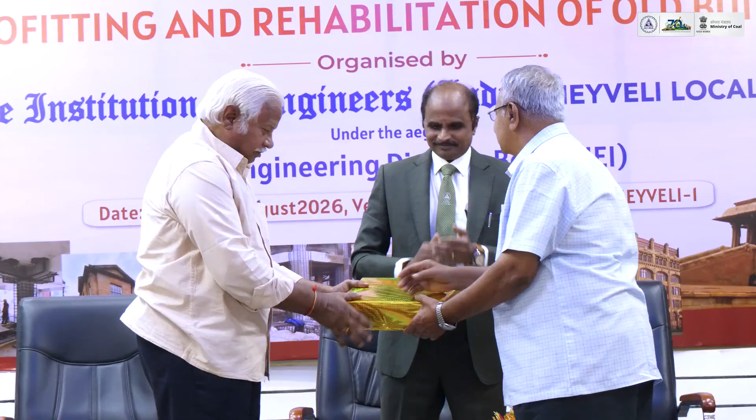Well, this is a very important place. It is a historic place, as it has been rightly narrated by our engineer Sivanyanam sir. It's a historic building, historic area. Because IEI, the Institution of Engineers, has brought several marvels in this country. It's a century or beyond century old institution. And coming to Neyveli Center or Neyveli chapter, whatever we call it.

Come Rajmohan. So another great... I was just looking that some mines' presence is not there. At the right time, mines people will visit. So that is how he has done it. So Rajmohan has come.

This Neyveli Center, if you see, started in 1967. It is much older than many of you present here in this hall. And if you go through the laurels of this institution, at the moment when I took over, when I listened to something and went through the files, I found it has brought transformation in this Neyveli. I do not know all these people by seeing them, so I got a little embarrassed.

It is not that just some programs or something they have brought, some changes they have brought. They have lighted the lives of many people. This is the center which has produced the highest number of AMIE during that period. And not just that, several people have occupied very high positions because of this center.

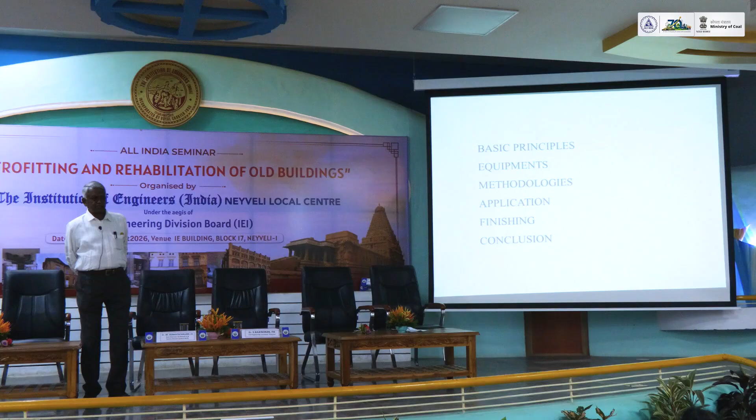See, it is only basic principles, there is no complicated fourth degree equations, nothing like that. It's only a weight - it goes down by gravity, and you lift it, then shift it. That's all. And it's not a frame structure, it's a load bearing structure. What we did that time, it was load bearing - even mud was used inside.

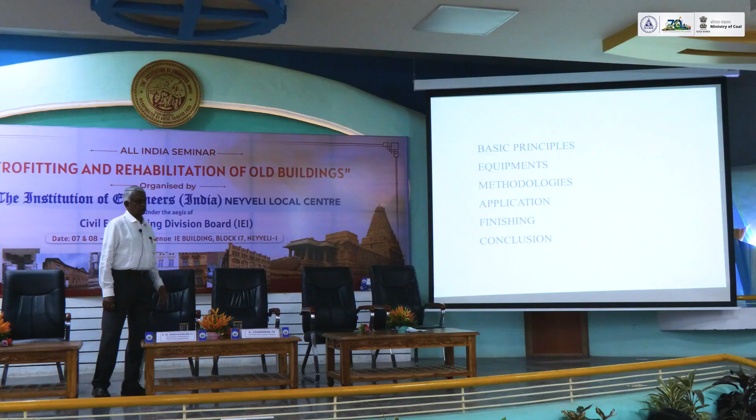So how have we done it? Basic principles, equipments, methodologies, application, finishing, conclusion. So this is the way I'm going to show you. See, the labor force, the labor cost, we'll come to it later.

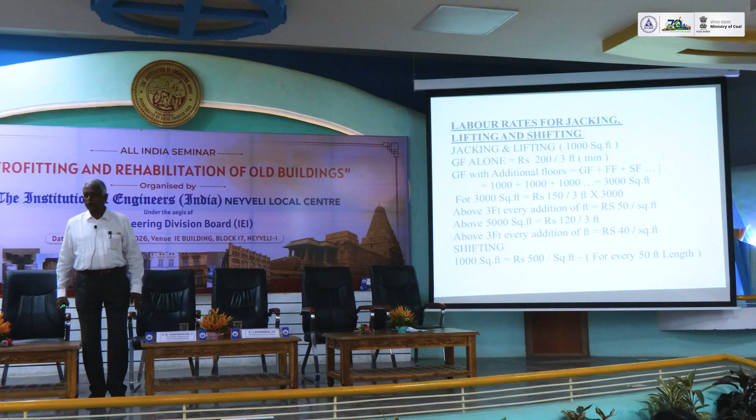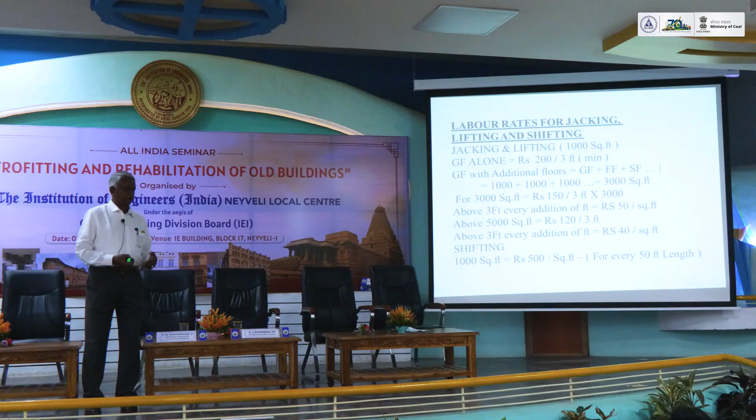For a 1,000 square foot house, if you want to lift it by 3 feet, that will cost us around 4.5 to 5 lakhs. Then the repair and creating a new floor and other things may work out to cost another 5 or 6 lakhs. So overall it will be around 10 to 12 lakhs to renovate an old house.

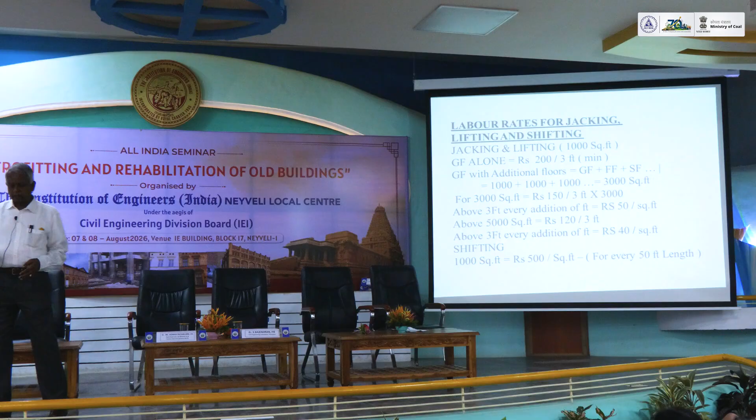How it is done - see, what we do normally, below the plinth, we cut the wall into 1.5 feet, 45 centimeters, 45 centimeters like that. We leave a space of 45 and cut 45, and insert a jack. It's only a mechanical jack, not a hydraulic one.

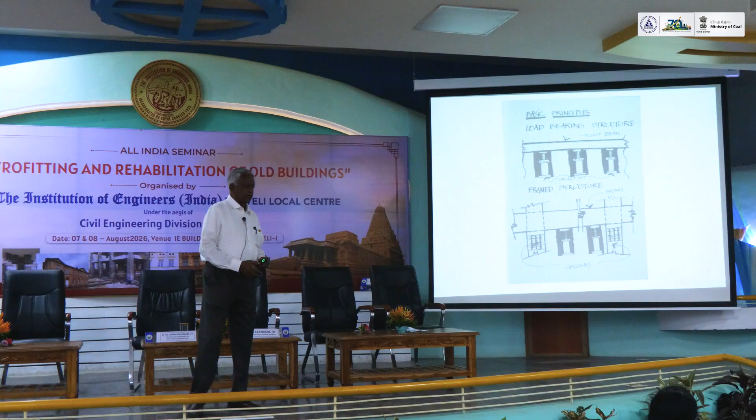See, foreign countries, they do it with hydraulic, but I'm against that. For a small house, you don't require that much machinery and costly equipment. If we make a mistake and the machine fails, there will be some problem, and facing that problem is very difficult - that's why we leave it, and the hydraulic system is very expensive.

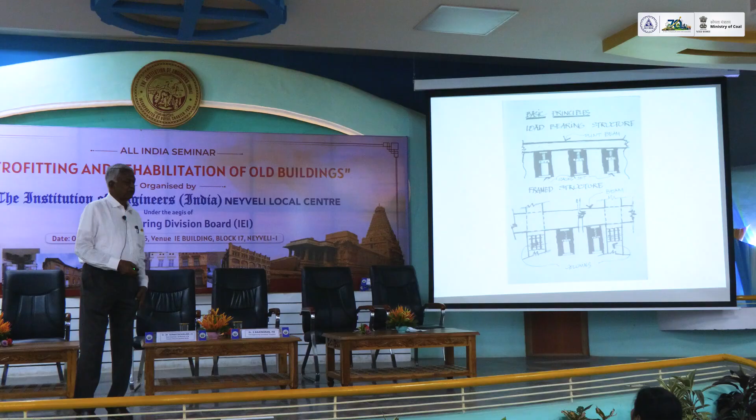Continuously we will be introducing about 150 to 200 jacks all around a 1,000 square foot house. Every 45 centimeters there will be a jack. We cut it and introduce it.

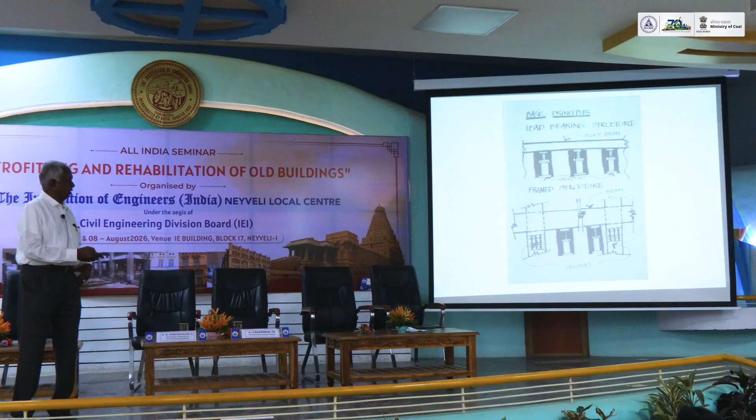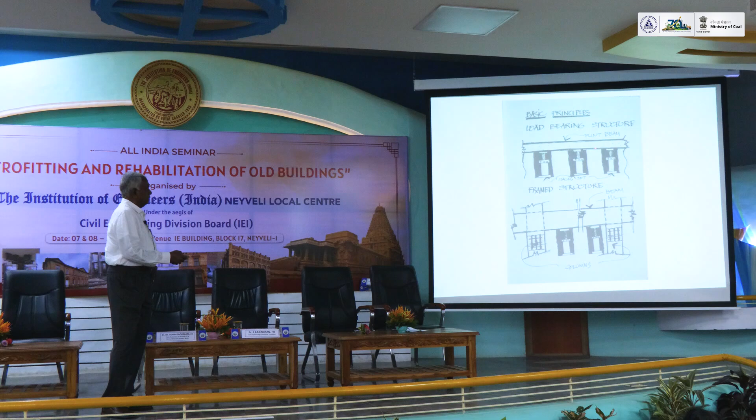Here, this is the frame structure, this is the normal load bearing structure. See, below this, once we cut it and lift it, once you lift it, it will get detached from here - three jacks or four jacks.

You remove it and insert a channel and fix the jack below the channel. Continuously we do it, and once that is done, till we complete the jack, the channel will be there. After building, you can remove one by one. All the channels are welded - welded together as a single unit.

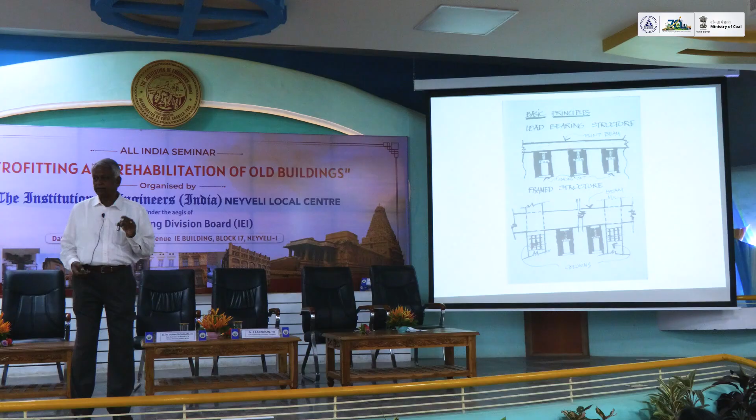See, the support jacks - for every 1,000 square feet house, we will have to load up to 200, since the weight of the house will be 200 to 250 tons. Around 150 to 200 jacks are used, and each jack can take a capacity of about 30 tons.

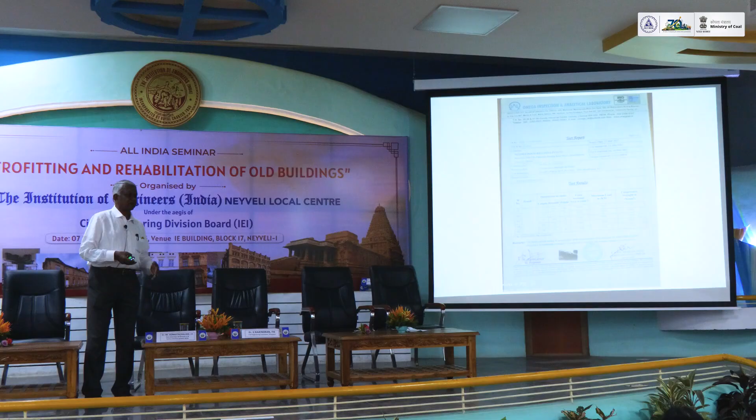See, this we introduce after lifting - a brick made out of concrete. The compressive strength we have given, the compressive strength of that brick will be 3 times more than the normal brick. So once the foundation is replaced by a concrete brick, it will be stronger, and the foundation will continue for another 80 or 90 years. This is the concrete brick we use.

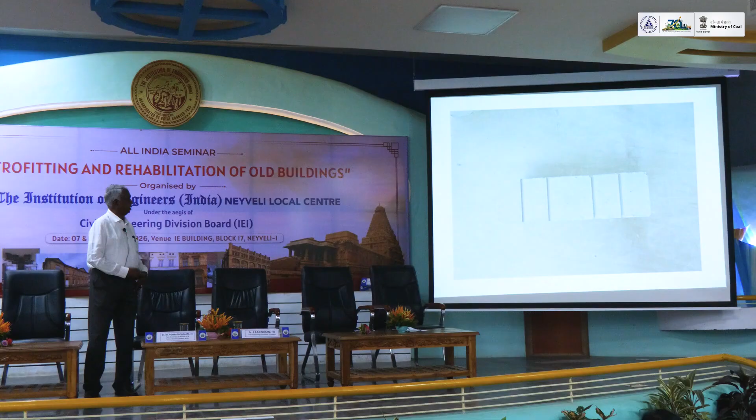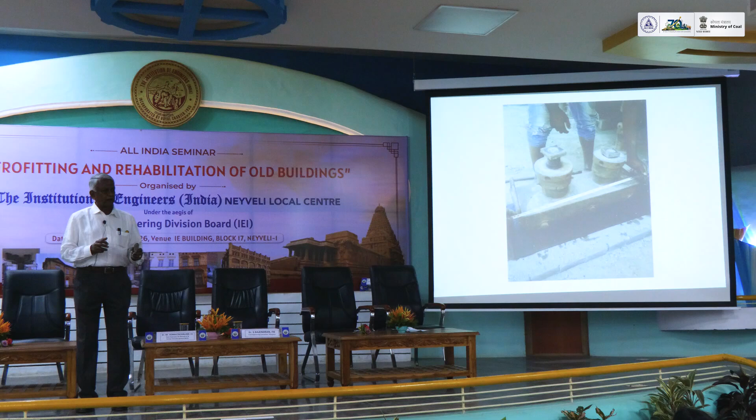See, this is a jack, and we have another jack for rolling. The lifting is done by a jack, it's one gear, we lift it. After lifting, we wanted to shift it, so we have rollers underneath the jack. That capacity is about 80 tons. This is one of the roller jacks.

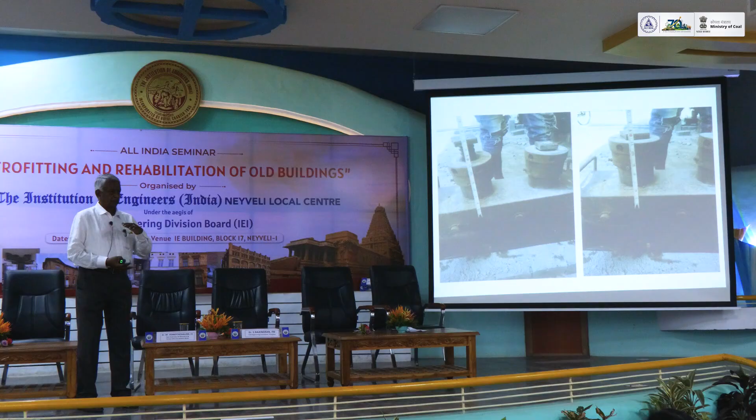The height will be about 12 inches, and once you shift it, it goes about 40, 50. Over that, we keep a wooden block in between to go for another 12 inches. See, look at the bottom of that, you see the gear, the shaft, roller or whatever you call it, iron roller.

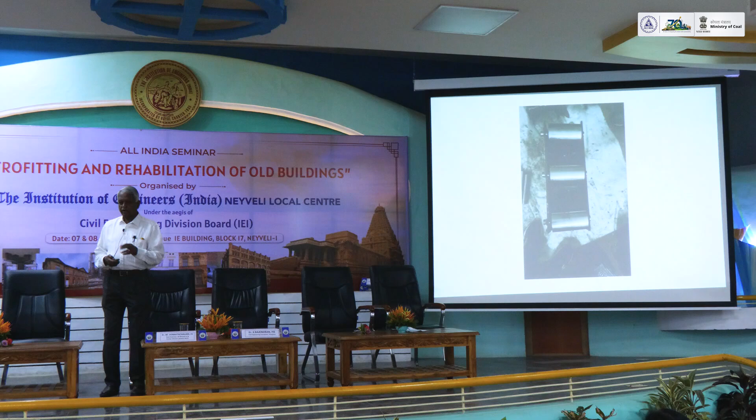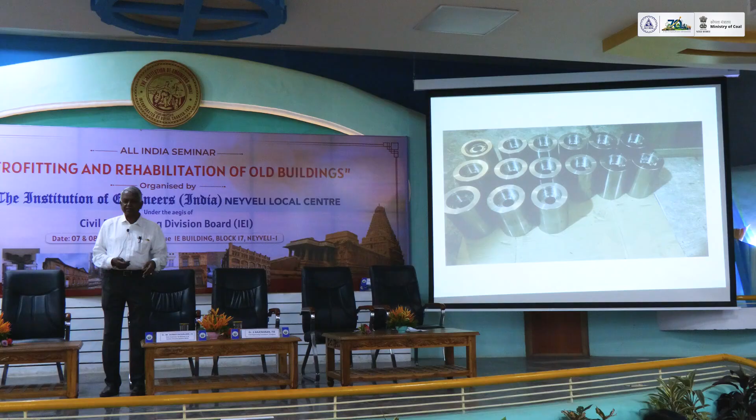See, it is placed like that. These are the rollers underneath the jacks. Probably I don't have to explain this to NLC engineers, you would have seen much bigger rollers of this type in a roller lorry.

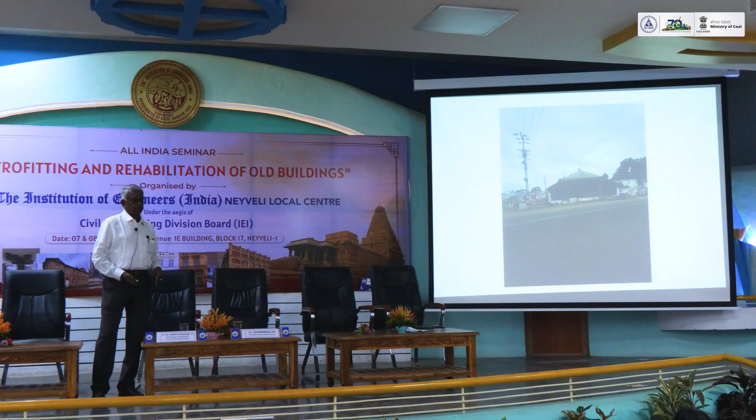See, this is the original mosque, which was just projecting inside the highway. This was the one, 385 years old. The mosque inside was laid with asbestos sheet roofing, which we removed. Inside, there is a Madras lime mortar building wall, and this has got arches, the windows have got arches. Over that, the asbestos sheet was laid.

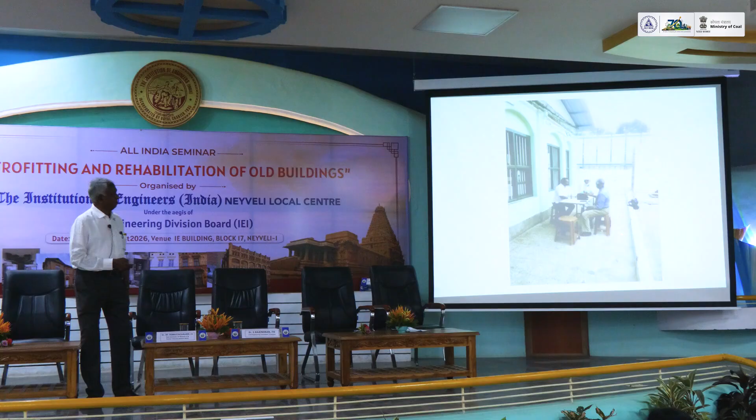See, this is the lifter. The jacking person is from Chennai, Babu. He has got a North Indian group of workers, so he controls them. About 15 to 30 people will be there, maximum 30, around 20 to 30 people will be there, and we are programming the schedule of how we are going to do it.

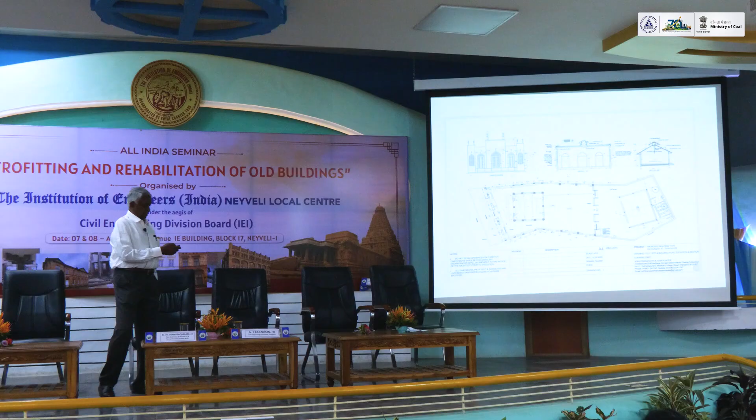See, this is the plan. Originally, the Dargah was here, in the same orientation. We lifted and shifted it 20 feet from here to this place. See this, originally it was here and then we shifted it. After shifting it, we have constructed a regular mosque, Dargah, with the RCC pillars here, a hall.

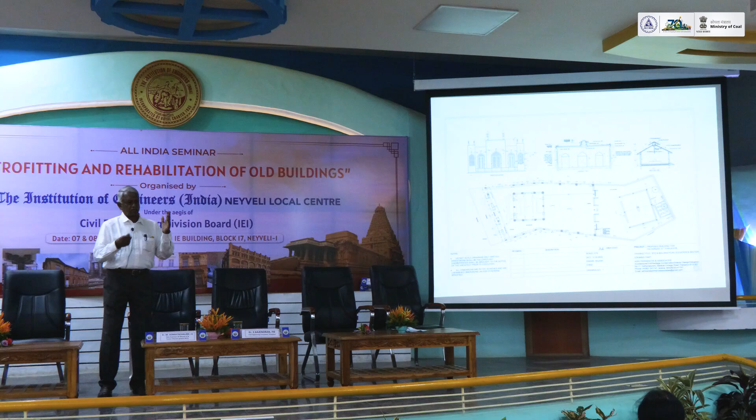And behind that, there was another cemetery that was also repaired. The design is a contemporary design, mosque design, but we followed the traditional system of domes and arches.

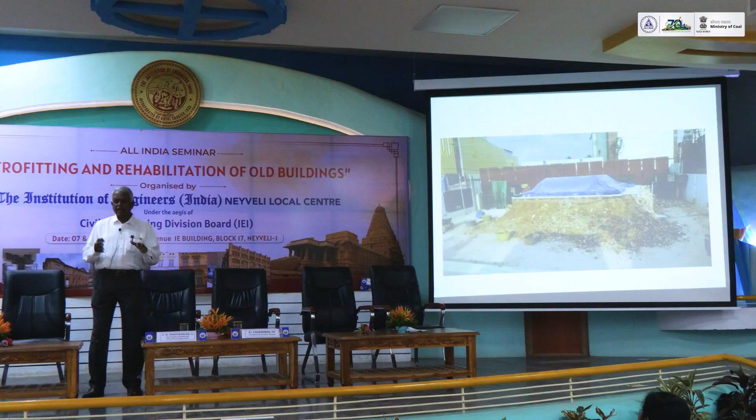See, this is the thing. The client was very particular about the bottom soil below that cemetery, 14 feet. He said 14 feet, we have to pack it and take it. So we have done it like cake packing, the whole thing. See how we have done it.

We used girders, I-sections cut like this, and then using either mechanical means we did it, see, you'll be seeing it. A pulley block with chain, and sometimes we used this JCB, just pushing it inside. See, this is 14 feet below.

You have done it continuously, 14 feet with 14, 14, 14. You have made it like a cake.

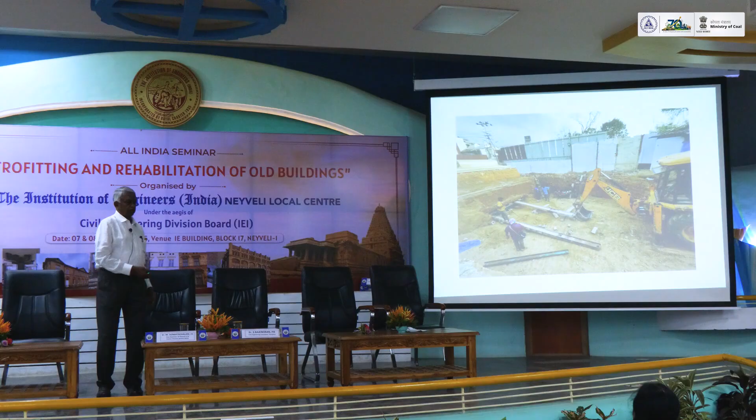But at that time it was about to rain, so we had to protect that mud. We have done it like this, using tarpaulin for that. And we had a pit also. We are very particular that rainwater should not get filled, so we saw to that. We made a ditch above that, at road level, and made the water flow in that direction. So we saved that also.

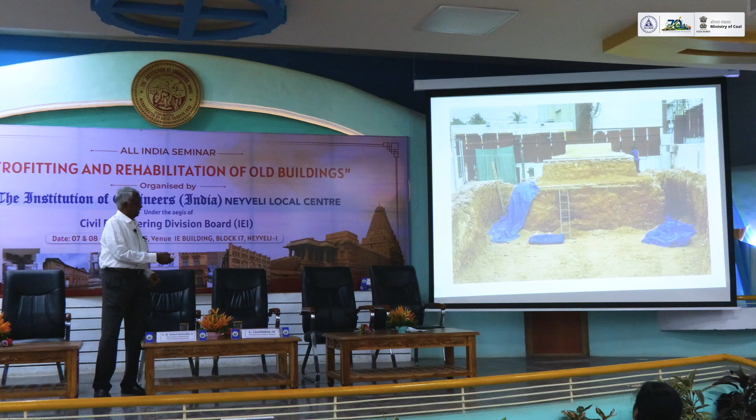They did only the lime mortar work, and they had put marble over it, that was in cement. All the rest was soil, only soil. And the client was very particular about the soil, he said you should not lose the soil. Even a small chunk should be placed inside, he was very particular about it.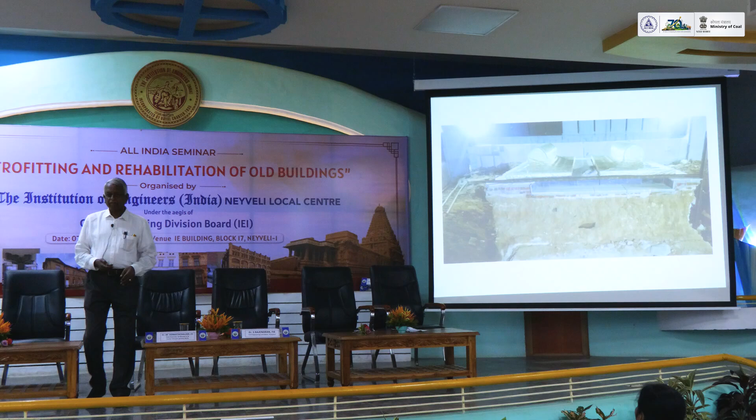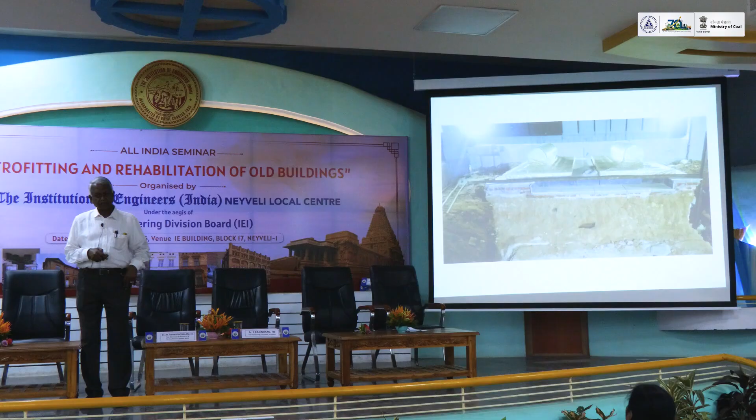I-sections were placed continuously, welded, we have welded it. No sheet, we have just inserted it. The I-section was taking the soil. Yeah, see, look at this.

After inserting, we used wooden planks with steel frames all around. We made it like this - something unconventional. You don't have theories for this, no precedence for whether it can be done or not. It's purely design at site, as it is in your hand. As an engineer, whatever has to be done, we have to do it.

Look at that, we packed it like that, here also, and the steel sheets are there. It's about 6mm steel sheets. We put it all around.

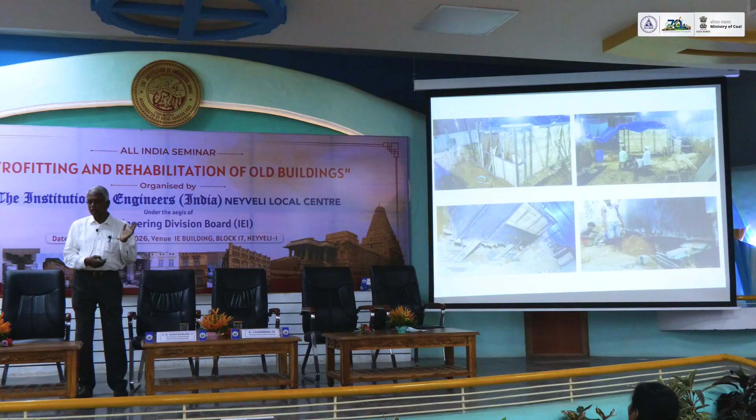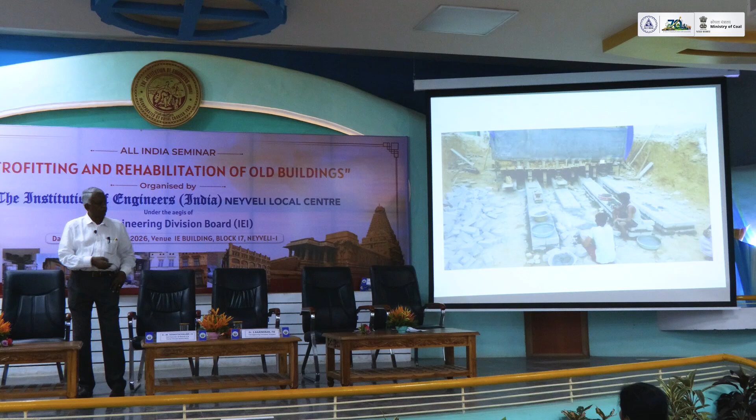Then after lifting, we wanted that to be pulled, so we created something like a path with concrete blocks, where all 5 jacks were placed in a line, the moving jacks. So we shifted along that.

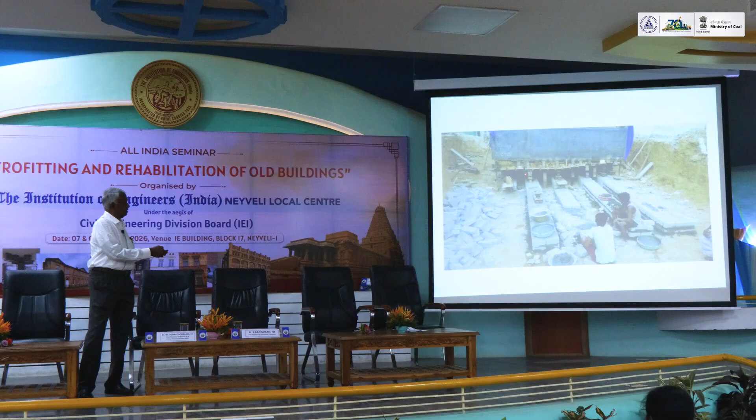We placed this in the direction it is going to come. We put a model here. How the pulling or pushing is done, everything is by pulleys. See, this is the one. He is there.

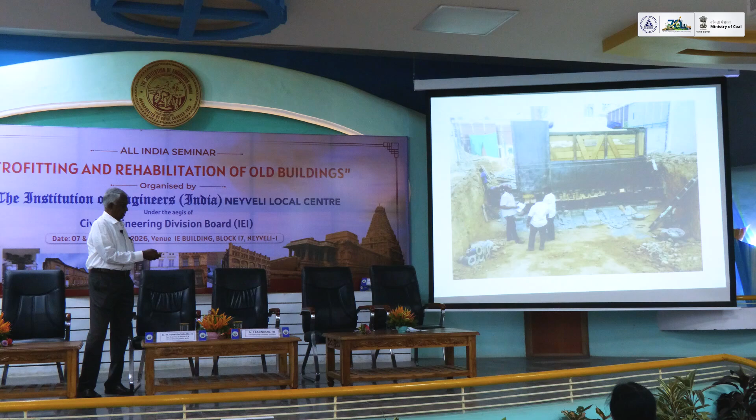People are moving underneath because we were very clear the whole thing was supported by I-sections. And I was scared - even the owner himself went underneath. I told him not to do that. He said nothing, the whole thing is so. He is an electrical engineer, so he said he could see the supports very well, and nothing will happen. We went inside. We made that.

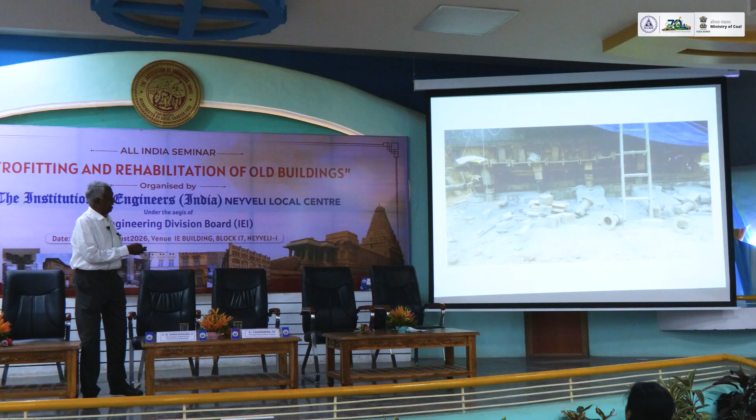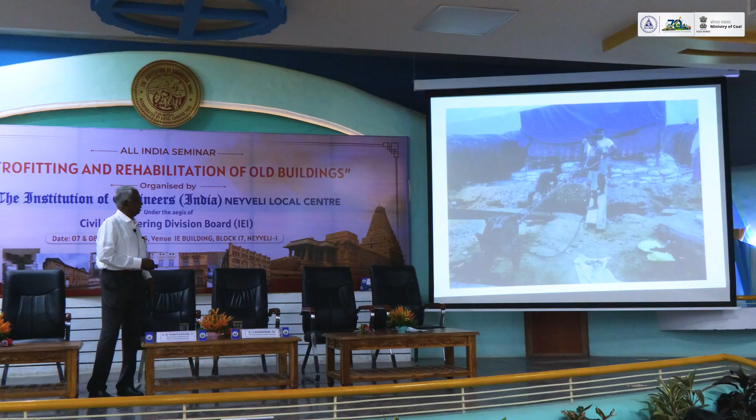That's a video, underneath this. After that we are pulling it out, taking it outside with the pulley block. Purely manual - we have to do it manually only. See, the place, you can't take a machine inside. You can't take a tractor, dozer, or JCB - nothing will work there.

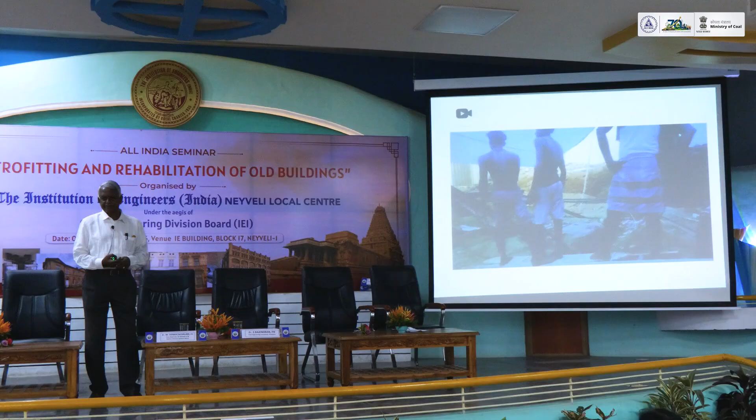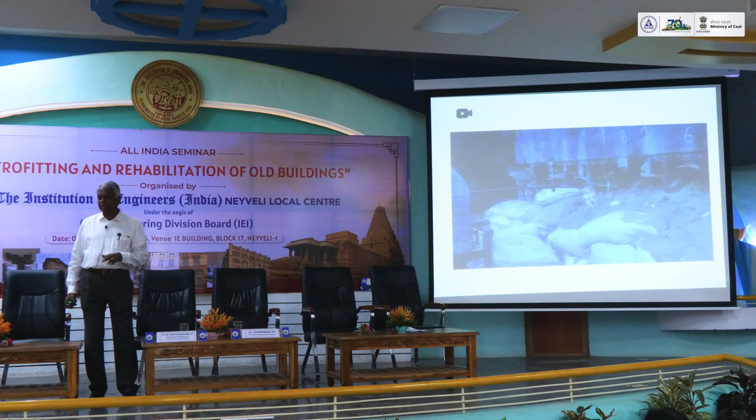One thing you need is a lot of patience and a lot of observation. You have to do very careful observation. Your judgment is very important - how you judge and decide what times you have to do it. We had very loose soil underneath. I made sure it was made-up soil when we did that.

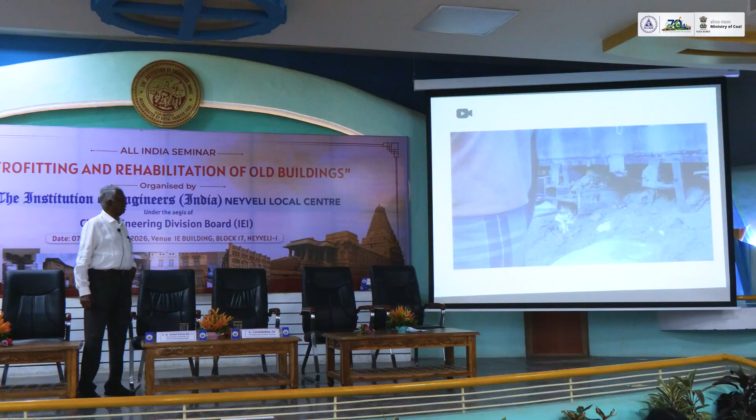If you do it, probably you engineers will think of something else different. But anyway, this was possible only in that place.

Chain pulley, pulley block - that's the chain pulley block. No, pulley block. That pulls it.

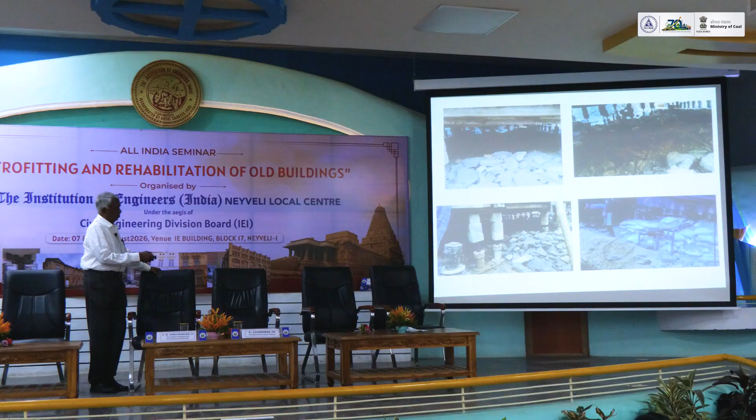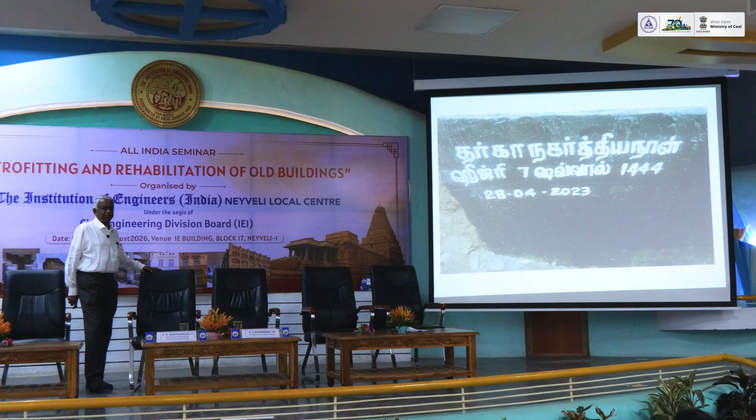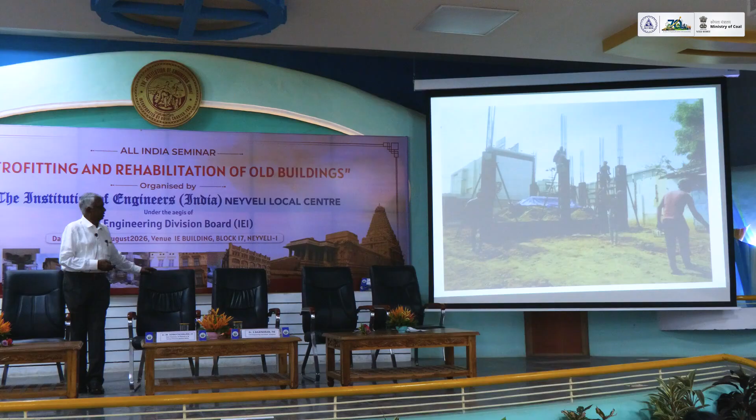After that we shifted and started constructing columns all around - RCC columns, filling, everything was done.

We maintained the same thing in their religion. They follow and are very particular about the orientation - they don't want to change that symmetry in any way, even 1 or 2 degrees they don't permit. They want it the same, so they mark it and shift it to the same angle. We have done it.

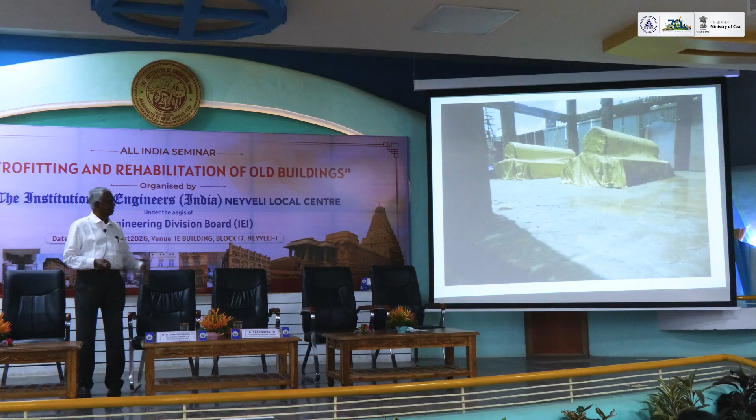When our forefathers built it, as the ex-chairman said, it was grand - built as an earthen dam, what they call a seepage dam. From 2000 years back, they put big boulders on running water. They chose a place and put boulders one after another. Due to gravity, it went inside and got submerged in the sand. The whole thing was packed. Then during high flood level, the water always seeps through - that is why it doesn't develop any pressure. That's called a seepage dam.

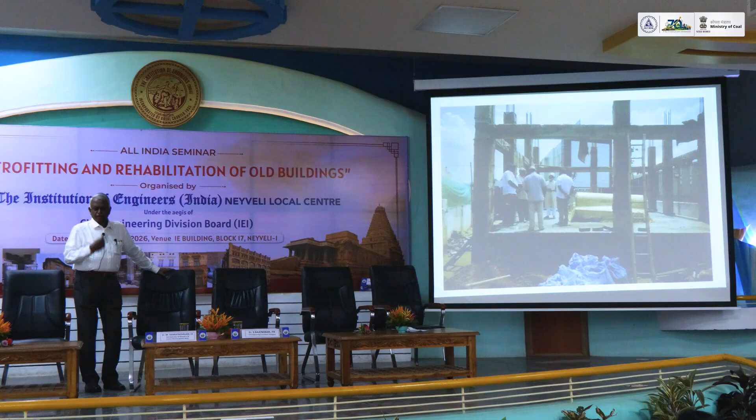That's why in hydrology, dams and everything - Percy Brown, I think, was a historian of architectural history. He says Dravidians are the greatest dam builders after seeing Kallanai.

The column extended for a hall at the back. The original shifting was over, and to provide a dome over it, we have put a ring beam. You put a real same type of symmetrical dome.

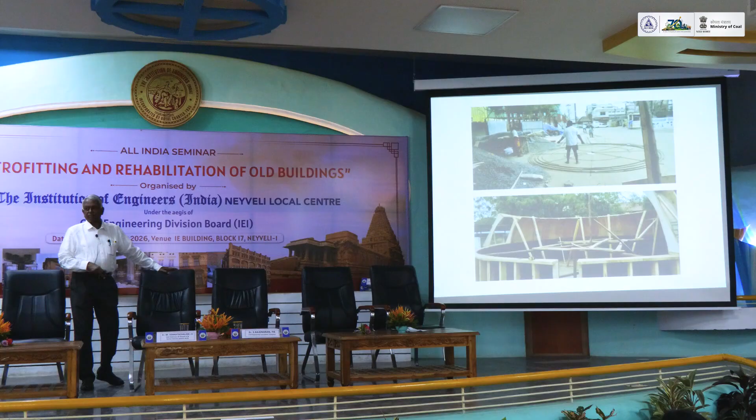In that dome, how we did the reinforcement, you can see it. This is how we have drawn it to the ground, line by line. For every ring, we marked it and corrected it, and we did a steel centering, plywood, flexible plywood. We did the curve, took a template and made a curve, and then in that we put the steel, and we got that there is a steel thing here.

In a dome, when you do the concreting on a slope, you need an outer formwork also, but we have not done it. We have done it layer by layer, taking it to the top. I had worked in Kalpakkam atomic power project, where when we did the domes, we had an inner formwork and outer formwork. The springing of that formwork on the dome starts with 90 centimeters. The bottom wall thickness will be 90, and at the top it will be 50 - it's a shell structure. Similarly, we did not do a shell structure here. We did the same thickness, both 6 inches, 9 to 6 inches.

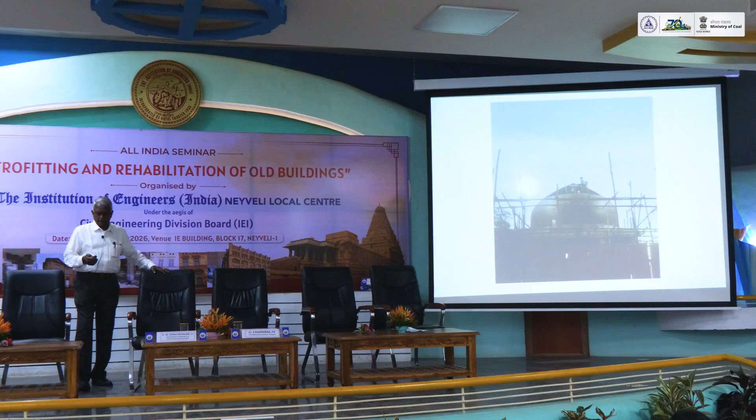See, this is how it looks when you see it from down. And we have a lot of ventilation everywhere here. And this is how it looks now. A lot of visitors are coming. We achieved the traditional heritage building, we have kept the heritage building in the same place, and we have made it much better for the people to enter and go. So this is an additional thing.

Why we do this? The first thing is sentimental reasons - everybody has faith in this dargah. So everybody wanted that, and the client was ready to spend for it. See here, the shifting is not that much - the construction is regular, very traditional construction.

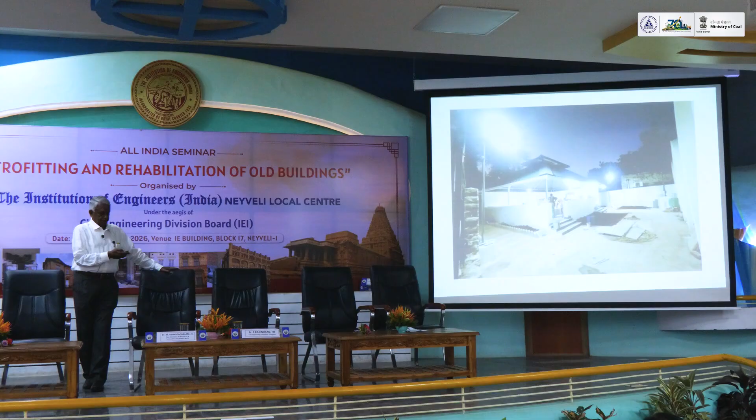See, it is opposite to Maharaja's shop, it is there. See, this Tanjore, it is in the history. In Tanjore, it is about 385 years old. This structure is in the history.

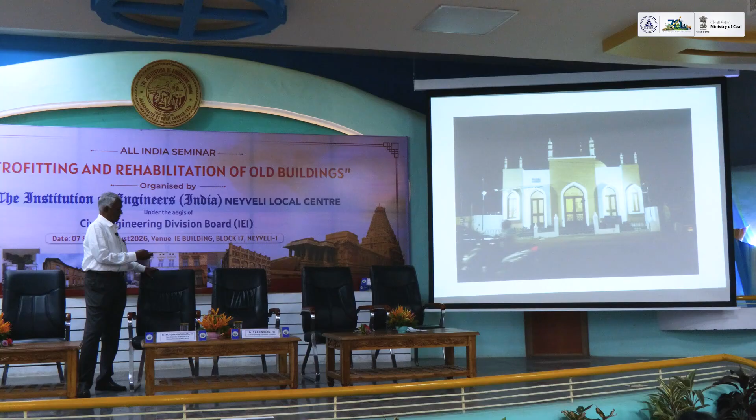So that is one thing they wanted to renovate - you can't say renovate, replace it, or even you can't say replace. Retrofitting also, it's not an exact word for that. It is strengthening and relocating. That's why I said jacking, shifting, and then lifting - jacking, lifting, and shifting. We have followed all the traditional motifs and the construction techniques, we did that.

The same thing, this is brass. Here, one problem is the lightning arrestor. We have taken the lightning arrestor nearer to that, higher than this level - this, what you call it, pinnacle, above that. So we were able to tackle that also in this.

See, the old and the new - same location, same angle, parallel to the road. We maintained everything, and exactly we were able to replicate the angles and other things. It was one of my career landmarks in that - giving back what I learned, giving back what I had. So this is one of the very important things in my career.

By doing this, we have renovated or regenerated that thing, the concept of that mosque and other structures.

See, another thing - I come from a place where Tanjore, what is it famous for? A very big temple, Perudaya, Thanjai Peruvudaiyar. You know what is the speciality of the temple? Sahar wanted me to add something to that, so I am just getting into that. As an engineer, what do you know about it? Yes, sir, foundation is one thing. Another - what is commonly said?

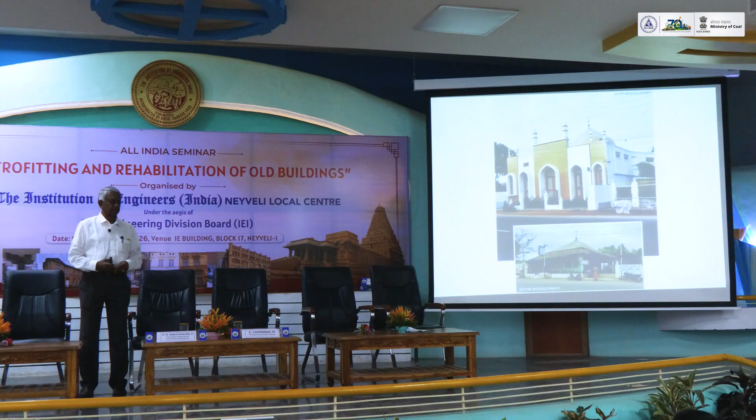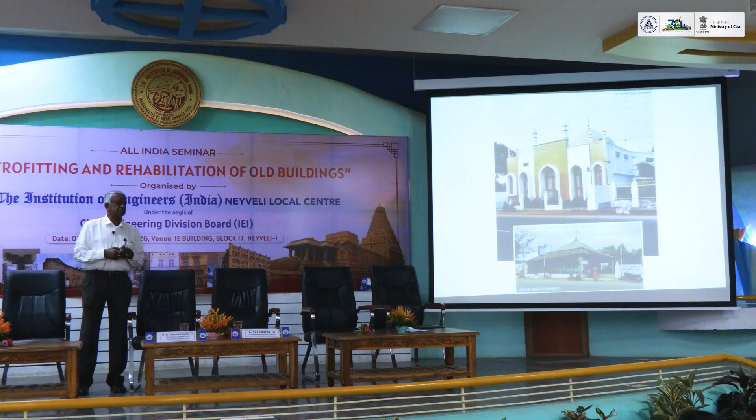The Sthapati, the chief Sthapati, is Rajaraja Kunjaramalla Perunthachan, chief. The second one is Nitya Vinoda Perunthachan. The third one is Gandaraditya Perunthachan. So 3 architects - they were called architects by modern naming, but they are the people who designed this. Especially the top chief architect, Rajaraja Kunjaramalla Perunthachan - Rajarajan has given credit to all these people in the inscriptions. He has given the names and written the names there. So that is giving credit to the person who has done it.

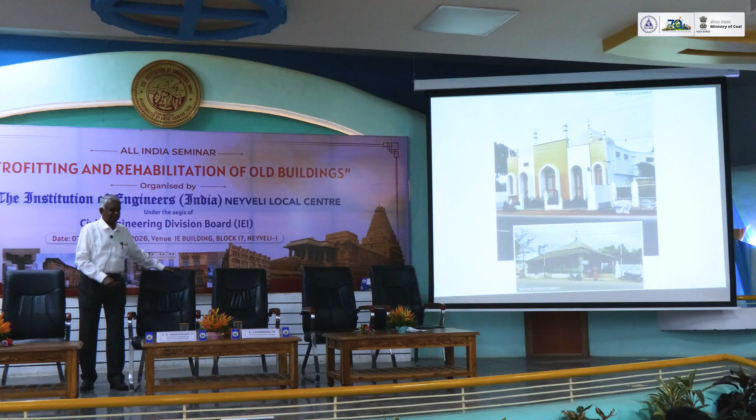And I think he wants to say something more, but anyway, when time comes.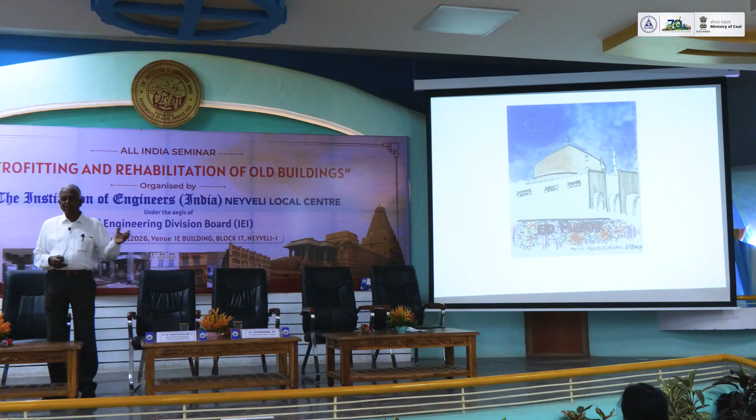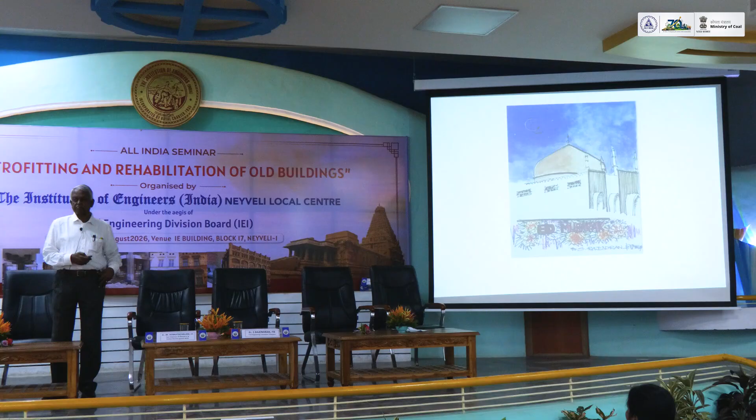And I did a sketch of it and then sent it - I do a lot of urban sketching. So one of my sketches, which I did for Ramzan greetings, I sent to those trustees. But anyway, this is what I have done, and if you want to ask any question, you can ask me. Do you have any questions? Below the soil.

But I saw you insert in the horizontal position. Yeah, the one has a bottom plate, I have used it as a bottom plate. Instead of minor axis, had you inserted in my major axis, vertical direction, it would have still given better results.

No, we have placed it so close and put underneath another support. I wanted the thing to go easily inside. If you go like this, we may require a lot of I-sections. Very minimum I-sections I have used, about 8 or something, horizontal.

In that case, for the horizontal I-section, that rough portion will be getting soil from it. The soil was loose at the top. As and when we moved it, we could see the soil coming down.

Technically, the I-section should be placed like this, but in between the gaps were wide and we expected some failures in between. So we never wanted that. Below that, we introduced another I-section, 1/3 distance from front and back.

Just for easy insertion, we made it very sharp. Now we have cut it with gas cutting.

Then we used that Poclain for everything. We pushed it 10 feet, then 20 feet. We moved from that 20 feet and moved towards west 3 feet.

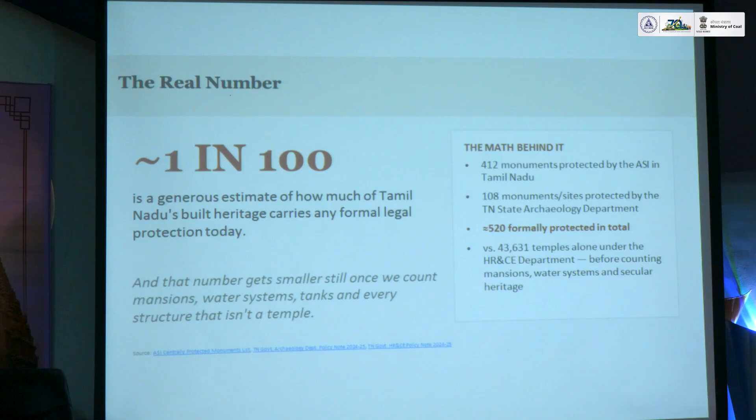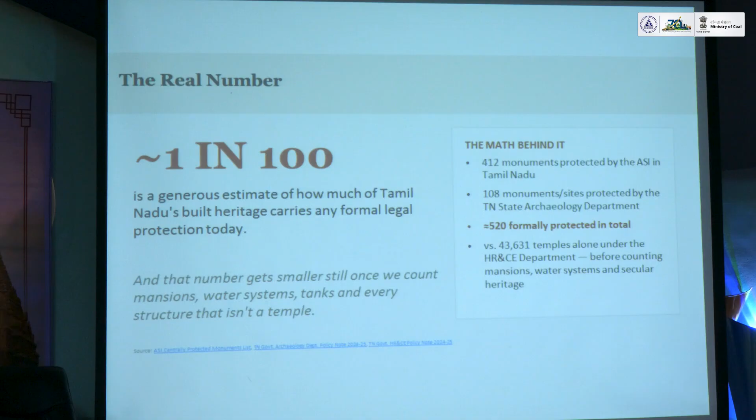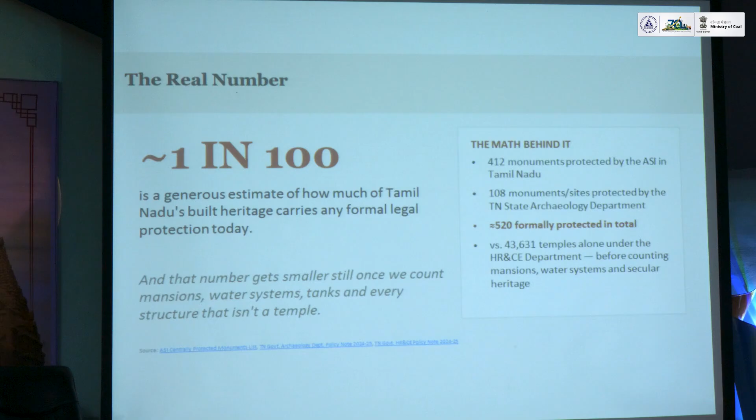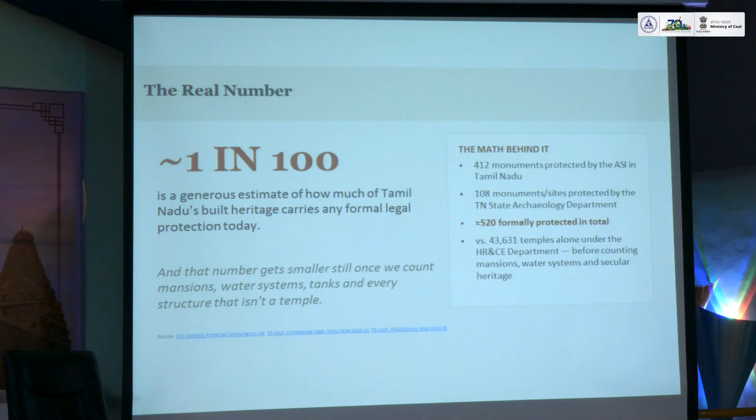Archaeology Department with Tamil Nadu government, apart from these, INTACH - Indian National Trust for Art and Cultural Heritage. This is an NGO started during the Rajiv Gandhi times, still practicing conserving heritage, protecting heritage, preserving and renovating heritage. Apart from these, there are very few players in the field involved with heritage-related matters. Thankfully, from 2017 onwards, Tamil Nadu government has incorporated a heritage schedule of rates for lime concreting, lime masonry, Madras terrace, and these specialized items which otherwise wouldn't be there in a regular schedule of rates. And a couple of days back, there was a 700 crore rupees sanction for reforming and renovating temples across Tamil Nadu.

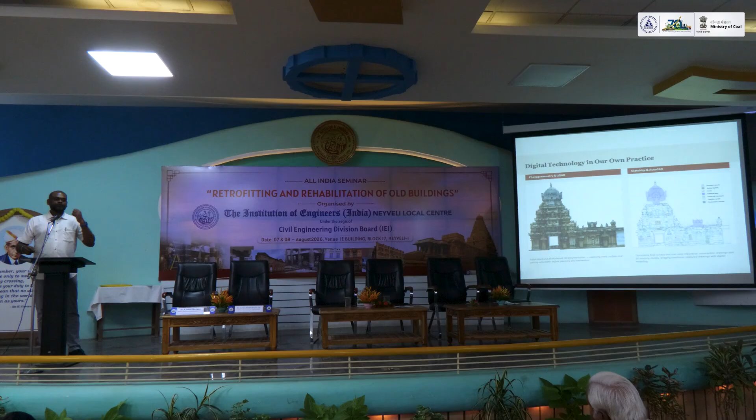Micro pores, microstructures inside the concrete are self-healed utilizing bacteria. That bacteria eats up certain things and excretes calcium, which clogs all the pores. Thereby, micro fissures inside concrete are completely sealed.

This is a very recent phenomenon in civil engineering. Civil engineers have started working on physics, chemistry, biology. So it is not a single field. When you travel into academics, you will realize at a certain point that all these things converge.